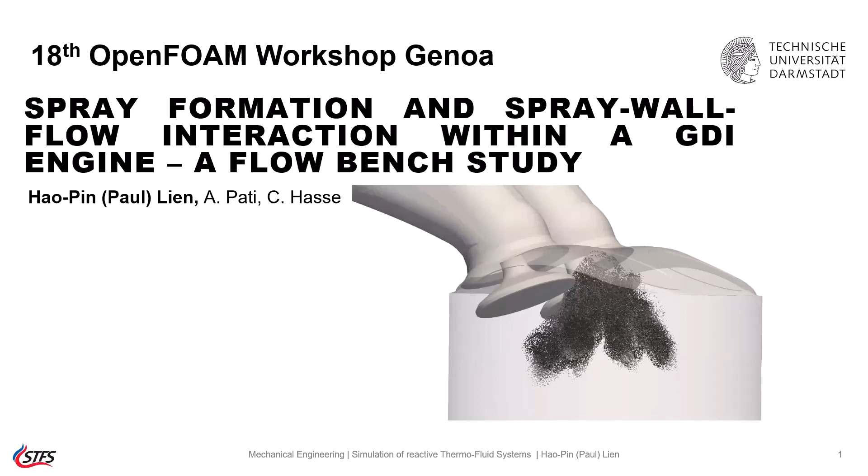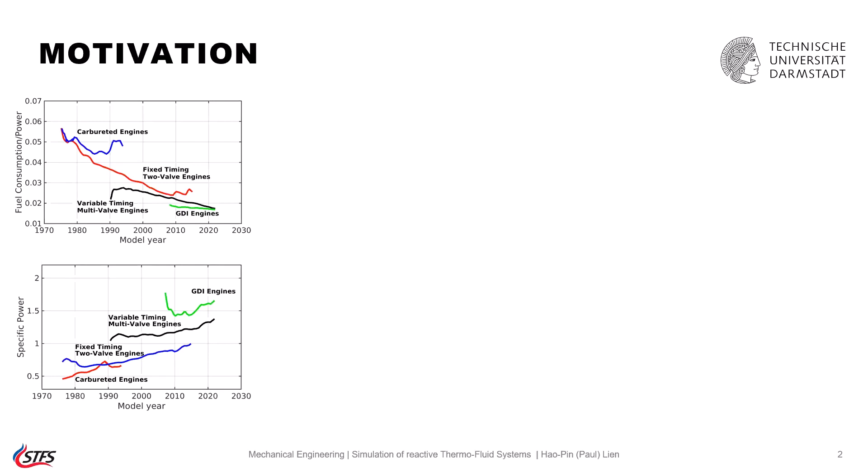Before we directly jump into the topic, I want to give you the motivation for this work. If we look at the time evolution of internal combustion engine development from the carbureted engine towards the GDI engine, we can see fuel consumption actually drops up to threefold. On the other hand, if we look at specific power, it's actually boosted up to 3 times more.

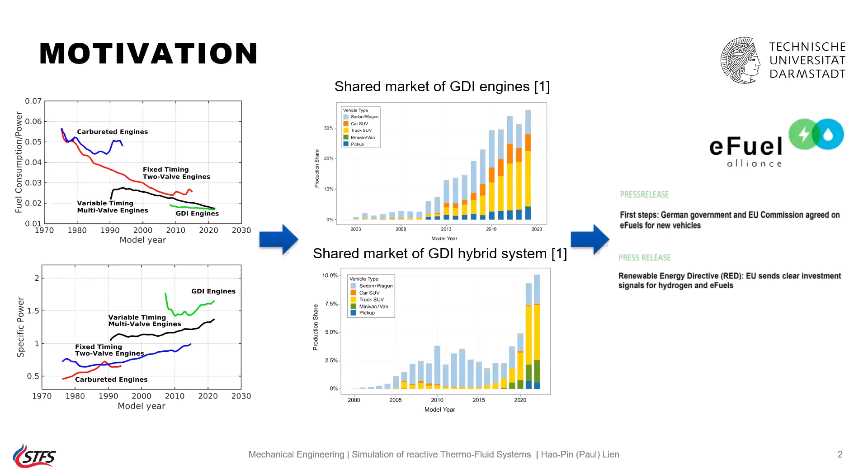Now, if we look at the market share of the GDI engine from last year, we can see it's still climbing, up to 30% of the overall total market share. And the GDI hybrid systems are also climbing, which means there's still room for us to develop. However, I understand we still have a headwind ahead, meaning zero carbon emissions. But we are still advancing ourselves toward e-fuel and hydrogen.

So now this study, we only focus on the Darmstadt engine flow bench. As you can see, the process of the internal combustion engine from the intake flow to combustion, there are actually lots of sub-physics happening. In this study, we only focus on the spray formation and mixing during the early injection condition, meaning the fuel is injected during the intake phase.

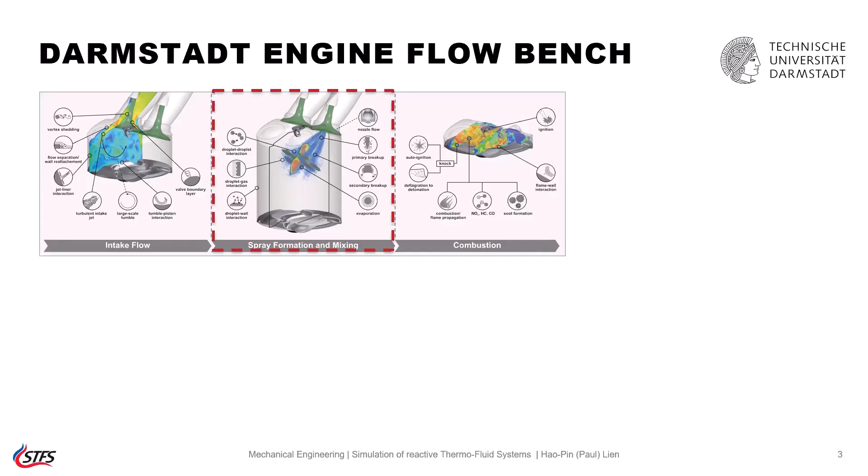And to reduce the complexity of the engine flow, I think the engine flow bench is a good candidate because it's operated with fixed valves and the piston removed, which means it resembles a stationary operation. On the right-hand side, you can see the experimental CAD model as well as the numerical one.

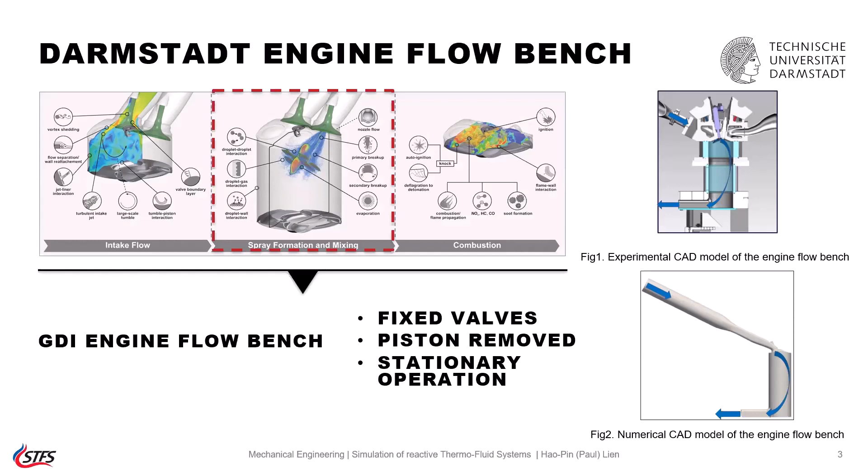Now I want to introduce our modeling development roadmap. We start from the small scale, which is a nozzle flow DNS. Then we move to the constant volume chamber, this is a free spray, what we have done. And then we advance ourselves toward the spray wall impingement. Once the simple geometry was well validated, we move to the complex geometry, which is the engine flow bench.

As you can see, the scale goes from small to large, and meanwhile the resolution reduces from DNS toward LES.

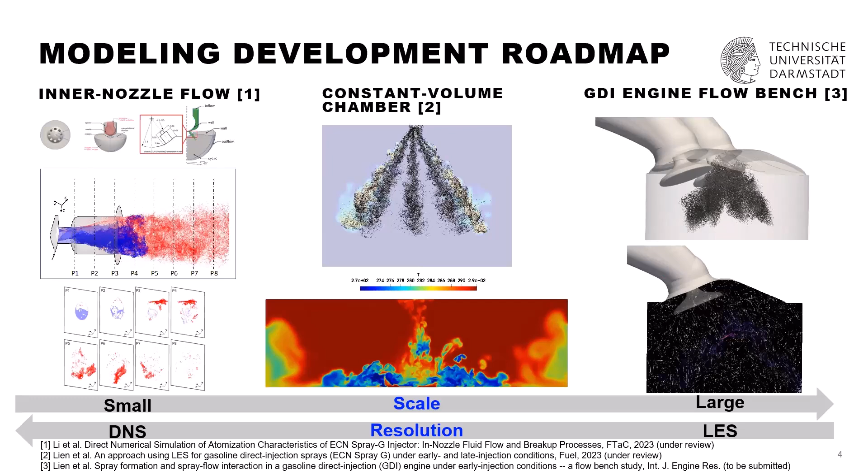If we look at the DNS data here, every time we make a DNS simulation, we always want to get the real physics or correct physics out of it, and we hope we could get a model from it and develop a physical model. So what is this? This is the injector hole. The blue one represents a liquid core, and the red one represents a total droplet.

Each section in between is only 0.2 millimeters, which is really, really small scale. And if we look at the P6 location, which is only 0.6 millimeters away from the injector tip, the total liquid core has totally broken up into droplets.

To give you a clearer idea, we printed out P6, all the droplets on the breakup region map, coordinated with Ohnesorge number and local gas Weber number. You can see none of them actually encountered shear breakup, but rather droplet oscillation and deformation. This is good information for us to develop our model suitable for the GDI engine.

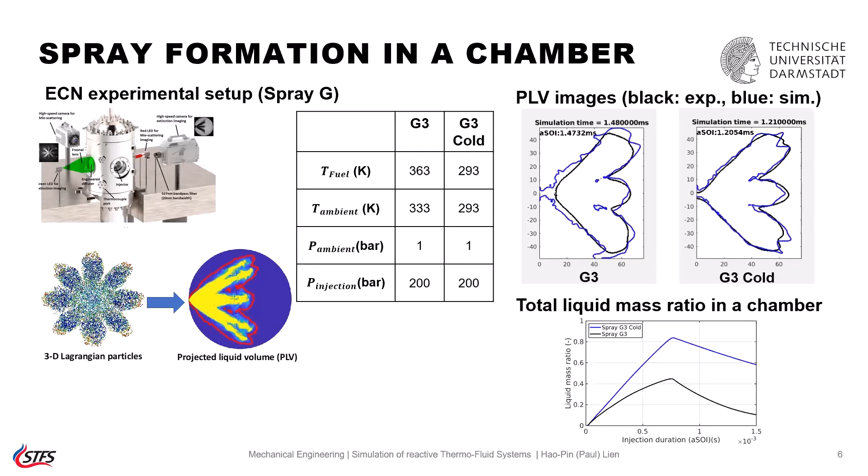So to understand more, we extract the total liquid mass ratio, normalized by the total injected mass, so you can see how much mass has already evaporated. Then we can see in the G3 case, given that it's only 70 degrees higher compared with the G3 cold case, it has about 50% more evaporation.

So there are two ways to solve the problem: one is to use wall-modeled LES, or you use wall-resolved LES. In this case, we certainly don't want to introduce any uncertainties from the wall modeling, so we are applying 15 layers on the wall to facilitate the wall-resolved LES.

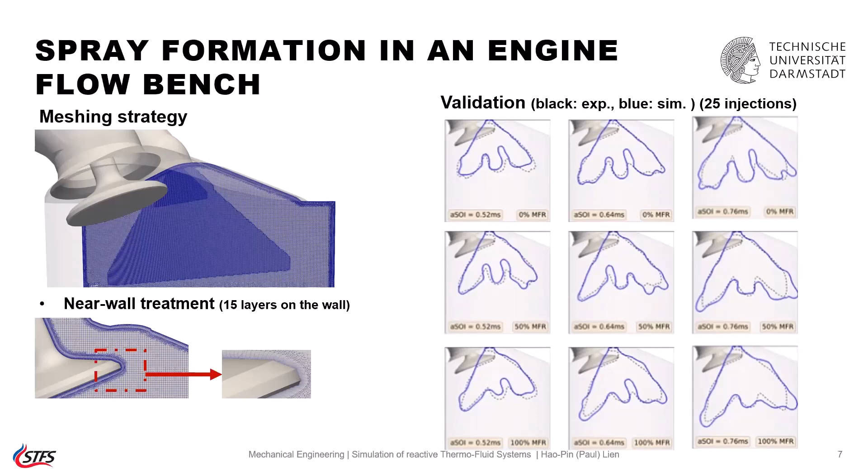We match quite well, but as we increase the mass flow rate, you can see the overall plume shape gets distorted. The left-hand side part is stretched by increasing the mass flow rate, and on the right-hand side, the overall plume actually swings to the right.

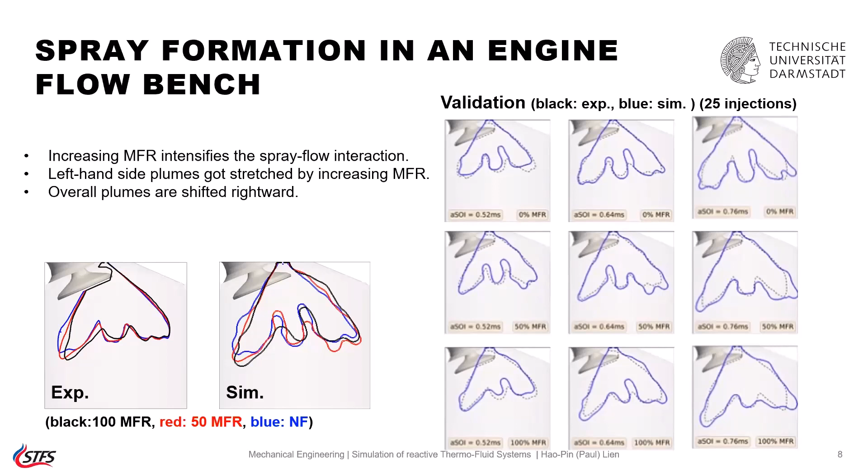We assumed that if the injector is axisymmetric, it should have homogeneous behavior. However, this is actually a heterogeneous phenomenon, though we can still categorize it somehow. If we look at the plume far from the intake valves, it has more evaporation and more distortion by the intake flow. The plume close to the intake valve has less influence from the intake flow, so it has less evaporation and less penetration distortion.

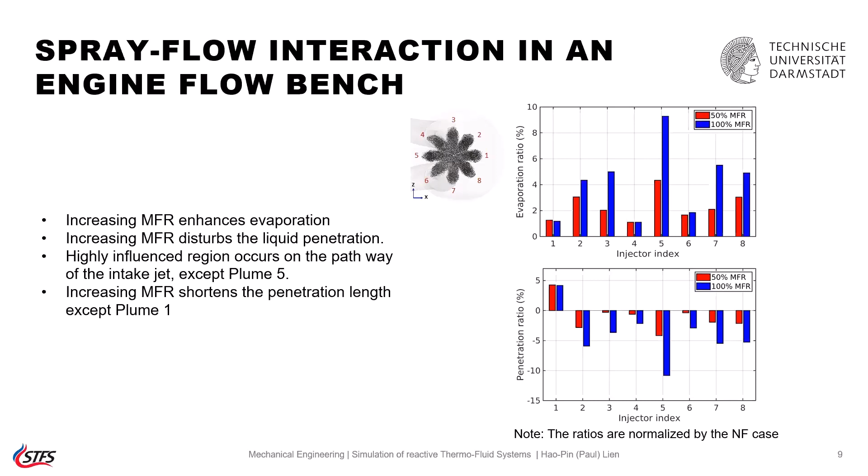But the most interesting are plume 5 and plume 1. Plume 1 is the farthest one - I expected it should have the most evaporation, but instead there's less evaporation and prolonged penetration. On the other hand, plume 5, close to the intake valve, actually has more evaporation and the most distorted penetration.

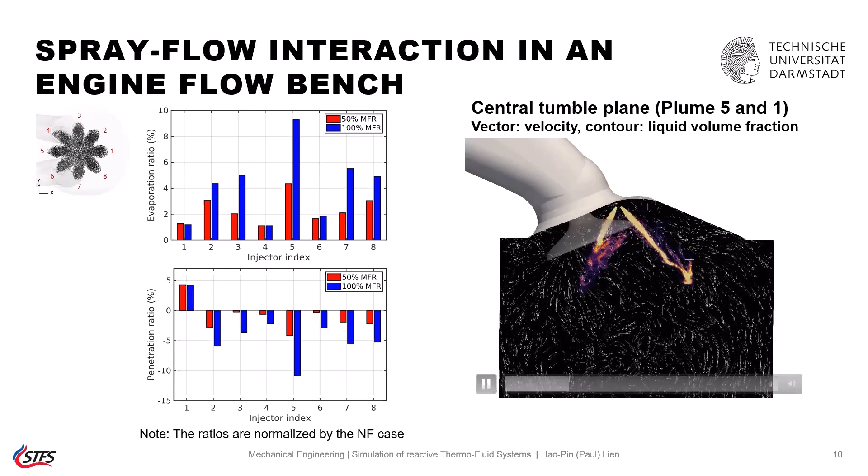So what is that? We extracted the liquid volume of the spray, and the vector here represents velocity. You can see on the left-hand side that plume 5 penetrates, then dissipates, and the structure gets destroyed along the pathway. The story happens quite differently for plume 1.

To give you a good idea of what's going on, we plot out the velocity field. When the two intake flows come through the two intake ports, they converge together and form a strong vortex in the middle, which lies right in the pathway of plume 5. Therefore, when plume 5 penetrates through the vortex, it dissipates and the structure is destroyed.

On the other hand, as we can see here, there is a tumble flow, and the tumble flow actually gives momentum to plume 1 and prolongs it.

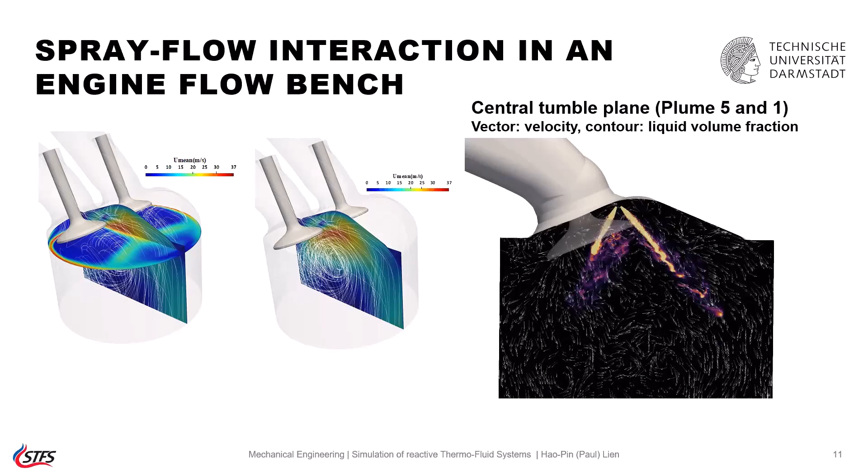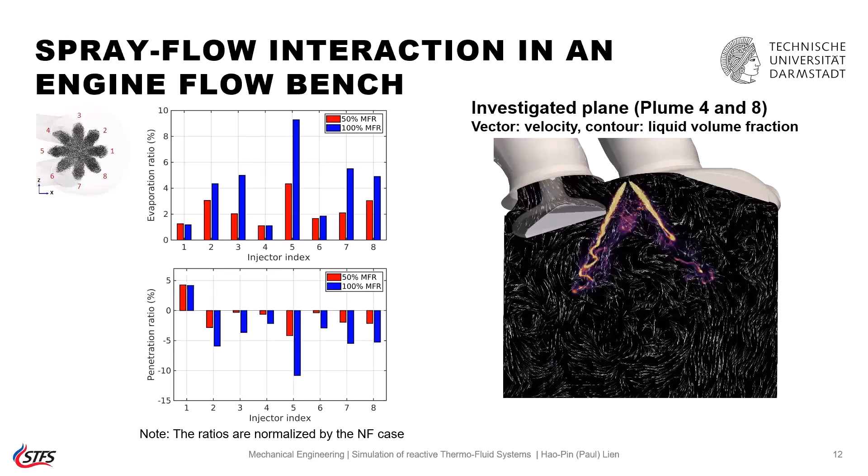But something interesting is plume 4. It actually hits the valve wall, and when it hits the valve wall, it can generate wall film, and the wall film might create soot, create a misfire. This is a hesitation, and this is something we certainly don't want to happen.

So we are using a single layer and developed a suitable spray wall impingement model, spray wall interaction model, to capture this and to see how, if we increase the mass flow rate, what convection evaporation effects can reduce the overall mass. We can see that as we increase the mass flow rate, the overall fuel mass actually decreased up to 50%.

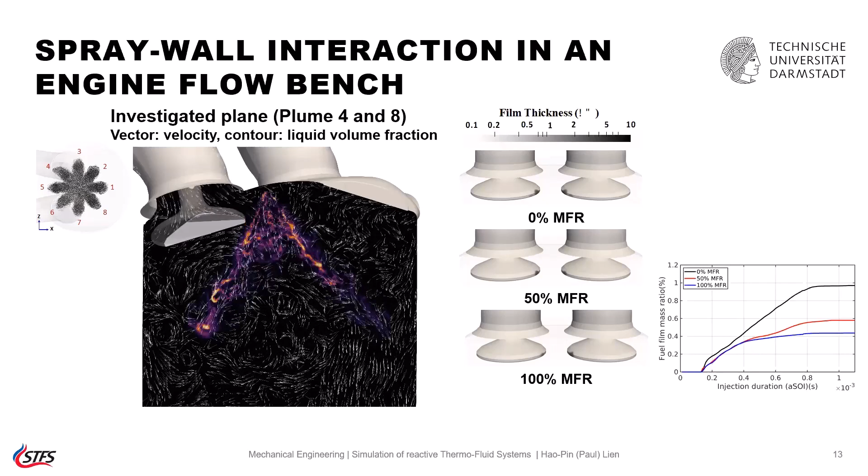I also have some preliminary results in the poster room, in the poster session before, so if you are interested you can have a look there. Then we are going to methanol fuel to understand further.

I put the bikes up there, not to just encourage you to run the bikes, because it's like a metaphor from ECN. Given that we have headwinds ahead, right, we have achieved a lot in the past, so we can still achieve and overcome this headwind. So just cheer up the engine group. Thank you.

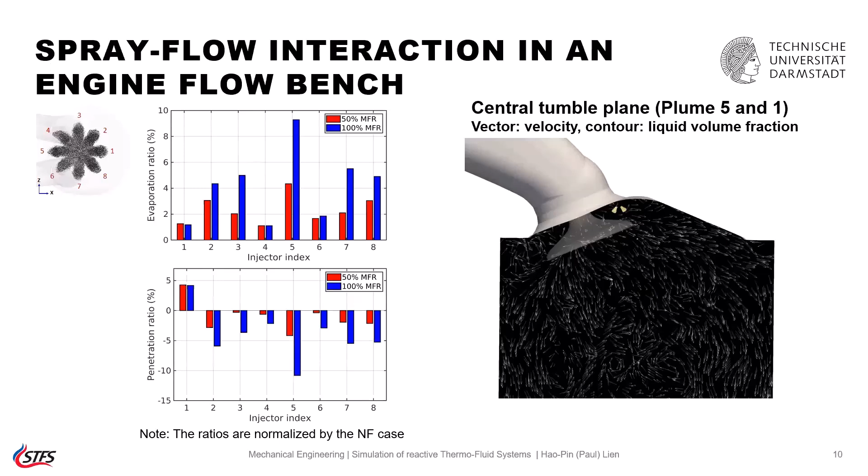Is that a Lagrangian model? Yes. So then you describe droplet size. Right. Yes. So we get the necessary data from DNS. This is how we want to run DNS, because otherwise it's just too expensive.

It's actually a one-way coupling.

So there's another way to do it: you do the whole structure. So maybe I'll go with this one. There's another way, so you do this DNS simulation and then you restore all the necessary data from, let's say P6, which is this part. Then you start to apply it to the Lagrangian—is that what I'm saying, right? Yeah, but we have one solver doing a direct transform to the Lagrangian field. But the problem is you're going to solve the whole domain.

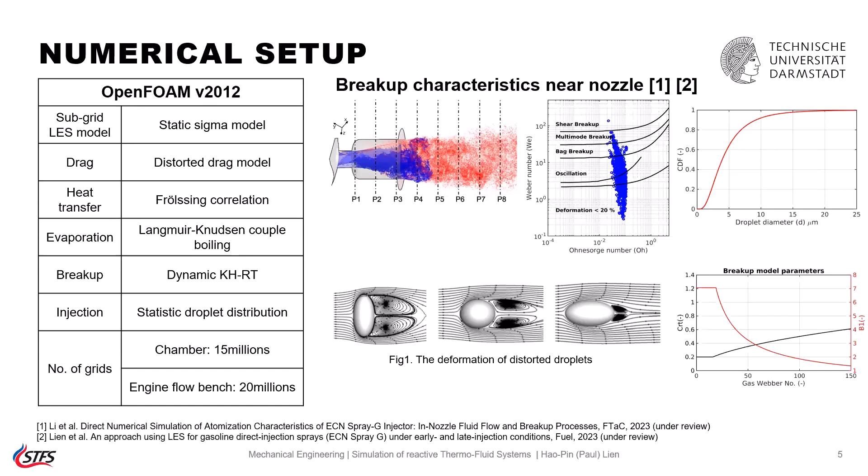Then this part is, let's say, micro, and this part is millimeter, so it's a totally different scale. I can tell you, here the minimum cell size is 125 micro, and here it's 1 micro, so it's 125 times more. If you bind it together, the CFL number is always the smallest one, which is forever.

Flash boiling wasn't shown here because the flow bench study is based on the G3 case, to be honest. But we have the G1 case in the poster, so if you're interested, you can have a look. Yeah, sure, good, of course.

Welcome everybody, I'm here to present some work, as my colleague has introduced. We are moving towards advanced fuels which are CO2 neutral, and this CO2 fuel is actually critical in engines. We want to use these biofuels because they help us follow strict emission standards, and they help achieve the European Green Deal's goal of zero CO2 emission.

What's the problem with ethanol and methanol, or oxygenated fuels in general? We need a large amount to be injected inside the engine. They are potentially corrosive for the metal parts of the engine, and prone to oil dilution, especially during cold start operation. From cold start, with modern engines and hybrid solutions, this is extremely important, meaning we expect a lot of warming engines, so we have to understand all the phenomena in such engines.

All of these are the phenomena involved. Here it's an advantage of OpenFOAM, because thanks to its open source flexibility, we can take really different models and cover all of this together.

We have several problems: multiphase flow, turbulence, combustion, knock prediction—a lot of problems. But today we just want to focus on the drop-wall interaction and how we can solve it in engine simulation, or in general, in complex geometry systems.

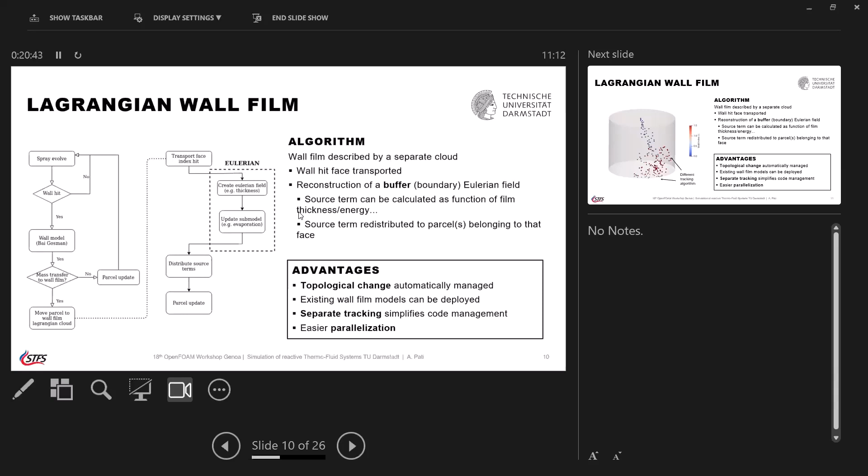Yes. If we don't find it, in any case, we have also 28% of computational cost. But for our case...

In that case, the initialization is possible. In our case, of course, we don't have this problem because it's a direct injection spray. So we started it, we know that the spray is 0 at the beginning. So for the initialization, it's always possible to initialize a set of Lagrangian. I think the initialization is possible - it's just a set of parcels on the wall. That could be a possibility. Maybe, why not? Yes, definitely.

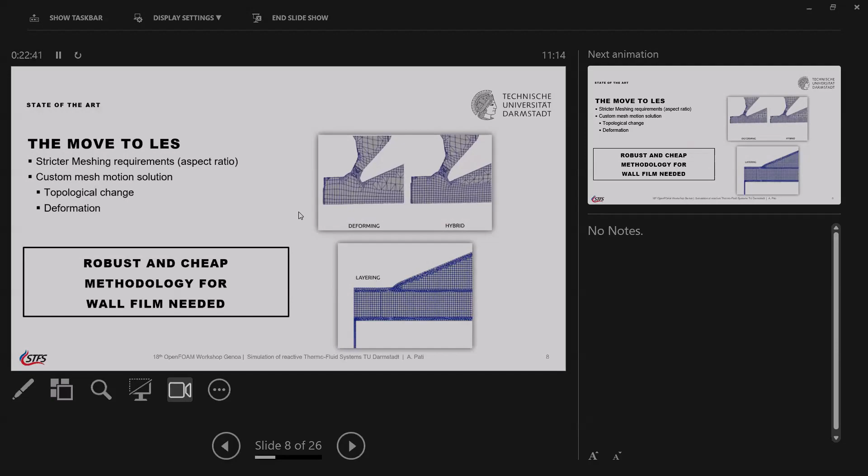Thank you very much. I'm Motohiro Oshima, from Toyama Prefectural University in Japan. Today's story is a very simple story. The title is the customization of OpenFOAM Lagrangian solver for superheated fuel spray vaporization.

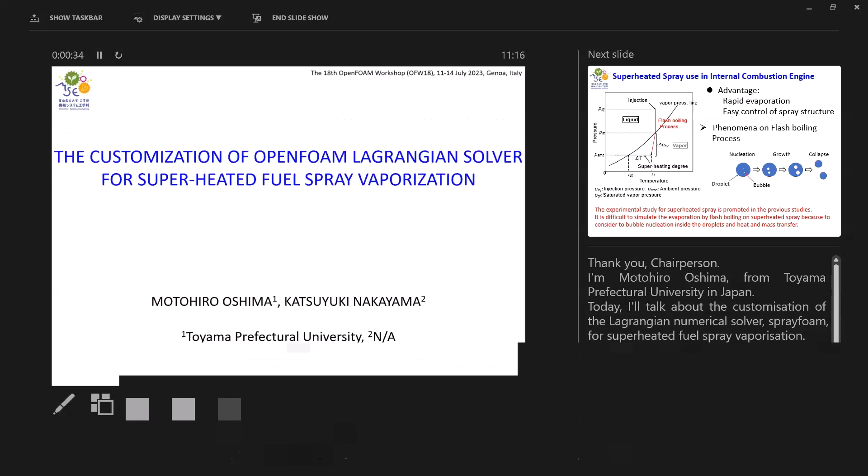Superheated vaporization flashing spray has advantages such as rapid evaporation, and control of the spray structure, and so on. However, the phenomena is more complicated, more complex. So this figure shows the process on a pressure-temperature diagram.

So the fuel is injected from injection pressure to the ambient pressure. So the pressure reaches the vapor pressure. So evaporating starts, it evaporates. As volumes are spread in the bubble, the droplets inside nucleate, grow, and collapse.

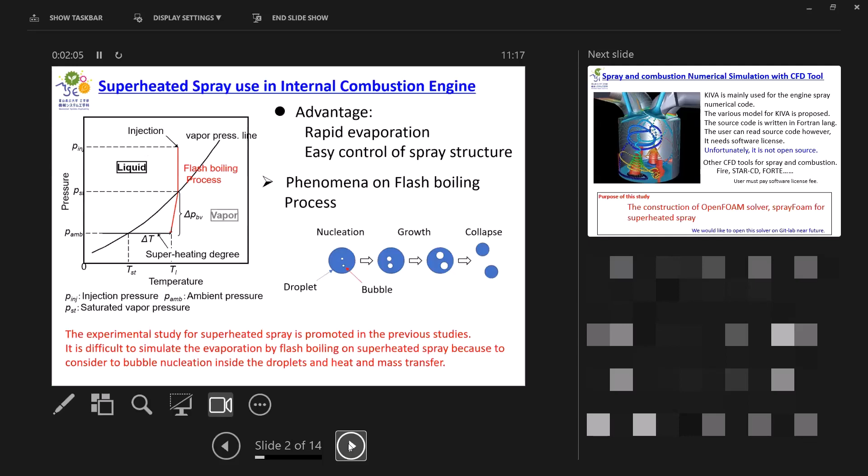The experimental study for superheated spray has been promoted in previous studies. However, it is difficult to simulate the evaporation by flash boiling spray because it considers bubble nucleation inside the droplets, and heat and mass transfer.

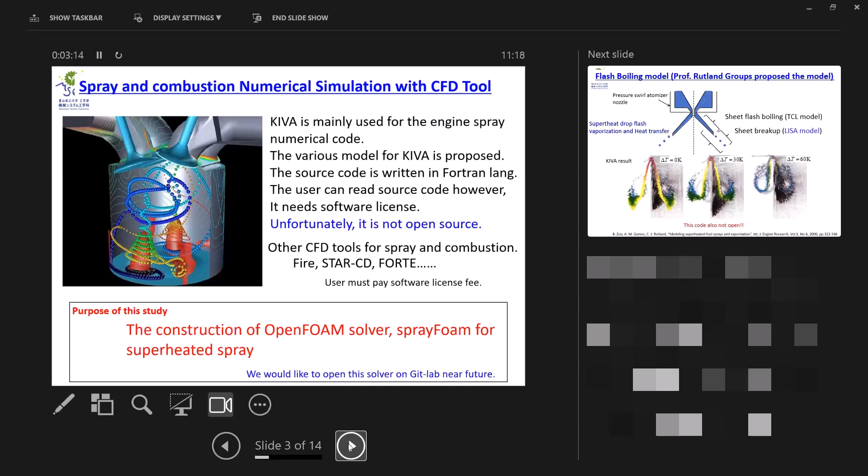As you can see, other CFD spray and combustion codes, such as Fire, STAR-CD, FORTE, and so on - the user must pay a software license fee. The purpose of this study is the construction of an OpenFOAM solver, sprayFoam, for superheated spray, and we are directing this program into the future.

So this is a flash boiling model. This model is proposed by Professor Rutland's group. This figure is a strain for a pressure swirl atomizer nozzle. So this model consists of three parts.

One part is sheet flash boiling, the TCL model. The second part is sheet breakup model. And superheated drop flash boiling, vaporization and heat transfer. So this is the KIVA result. Delta T is the difference of liquid temperature, pure temperature, and boiling point.

Delta T is zero, delta T is zero means there is no flash boiling.

The spray cone angle is wider, and the force is promoted. However, unfortunately, this code is also not open.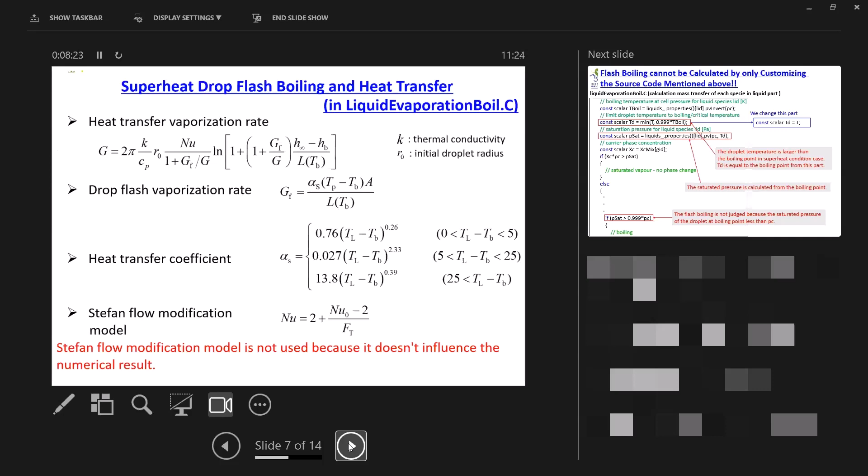Here are the Nusselt numbers in superheated spray, so changes must be made using the Stefan flow modification model. But the Stefan flow modification model is not used because it doesn't influence the numerical result.

However, flash boiling cannot be calculated only by customizing the source code mentioned above. This is part of the LiquidEvaporationBoil.C code. This task calculates each species in the liquid part to judge flash boiling or evaporation.

You can see this curve: the droplet temperature is larger than the boiling point in the superheat condition case. From this graph, T is equal to the boiling point, and the saturation pressure (PSAT) is calculated with the boiling point.

Let's move to the numerical condition and computational domains. Iso-octane is used. The fuel temperature is 435, superheat degree is 60 Kelvin, ambient pressure is 100 kilopascal, and ambient temperature is 300 Kelvin.

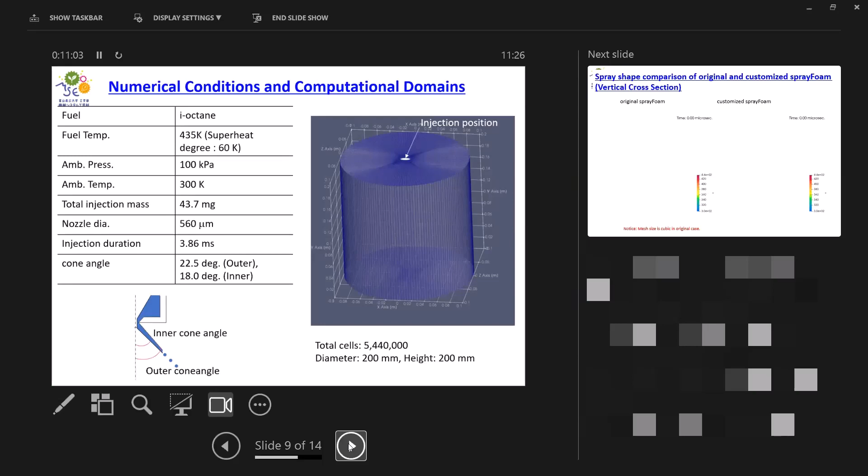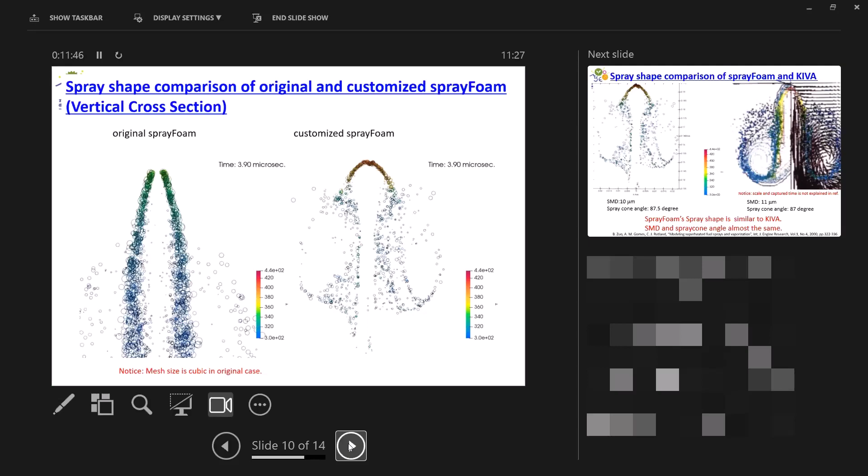The color represents the temperature, droplet temperature. We compare the sprayFoam results with reference data, but the scale of the captured time is not exactly correct.

The scale factor may not be correct, but the sprayFoam result is similar to KIVA, and the SMD and spray cone angle are almost the same.

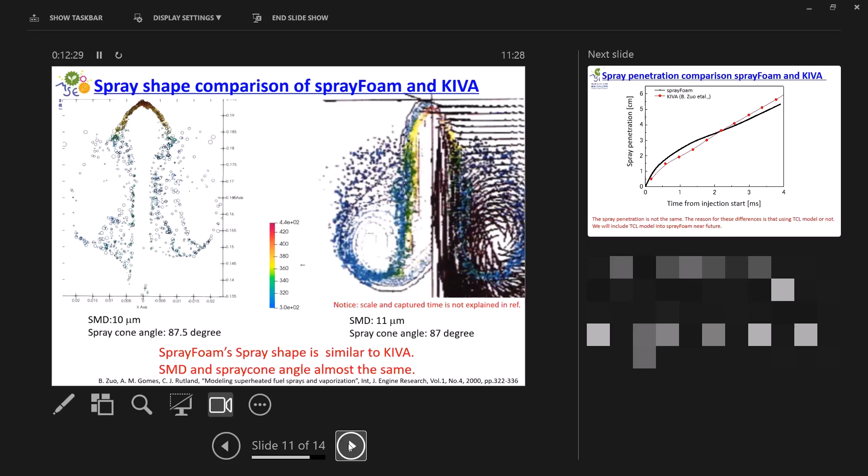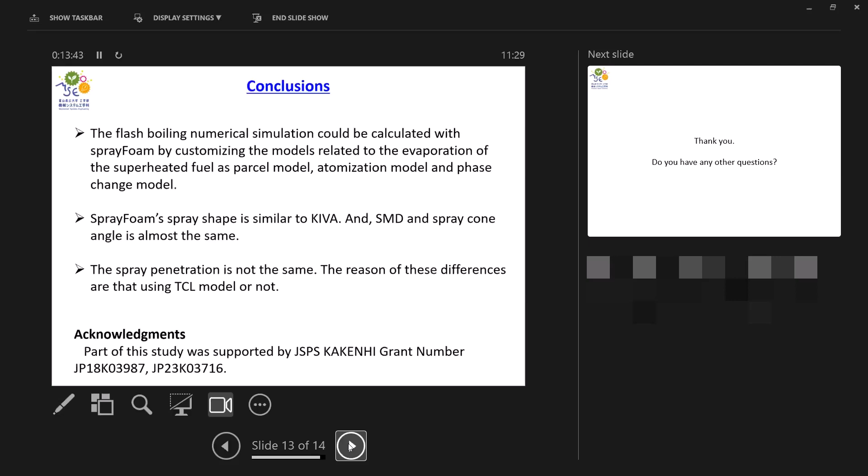SprayFoam's spray shape are similar to Kiva, and the SMD and spray cone are almost the same; the penetration is not the same. The reason for this difference is whether the TCL model is used or not. This is all of my presentation, thank you very much.

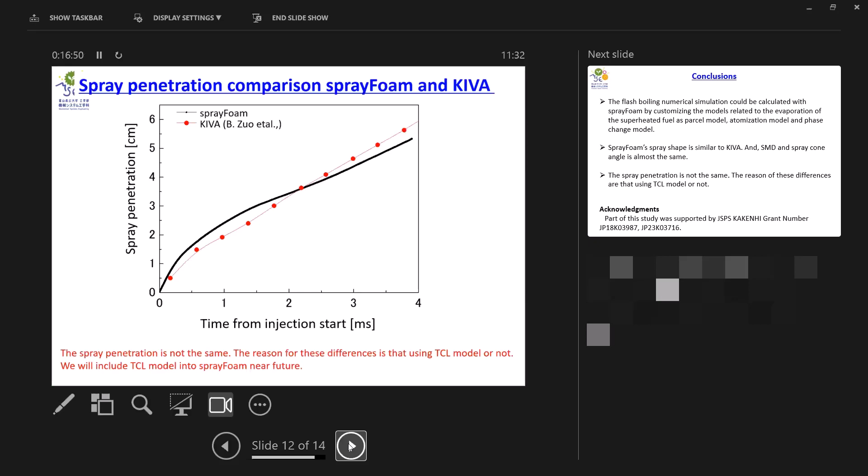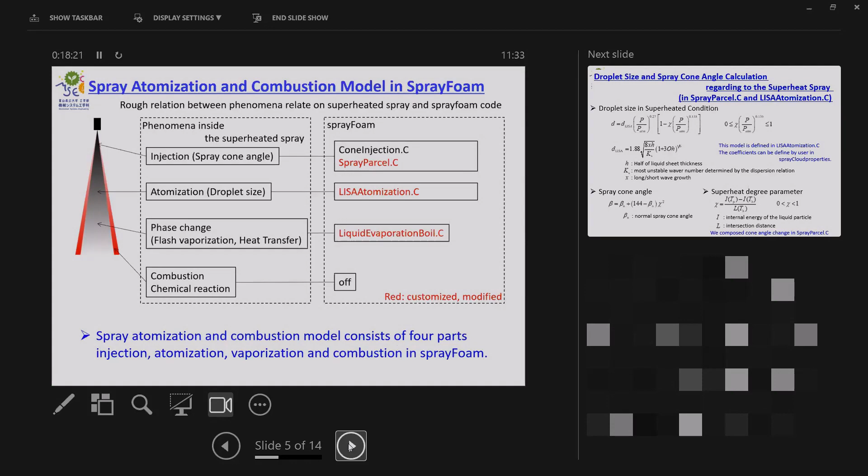Good morning, everyone. My name is Muthaiah, and I am a research scholar from the Department of Mechanical Engineering at the Indian Institute of Technology, Madras. Today, I am delighted to share with you the research and findings from the implementation of a Lagrangian model for the atomization of liquid jet in cross-flow spray in OpenFOAM.

The motivation for this work comes from my focus on CFD modeling of combustion in afterburners. In an afterburner, the combustion process heavily depends on the jet-in cross-flow spray. Hence, a robust model for the atomization of the jet-in cross-flow spray is needed.

Introduction of the jet-in cross-flow spray. Jet-in cross-flow spray, or JICF spray, is a widely used spray generation technique. This atomization technique is simple but also efficient. It finds usage in many aerospace applications such as gas turbine engines, afterburners, and ramjet combustors. In this method, a liquid jet is injected into a cross-flowing gas stream and is atomized by the aerodynamic forces to form the spray cloud. In the current version of OpenFOAM, there is no atomization model for this kind of spray.

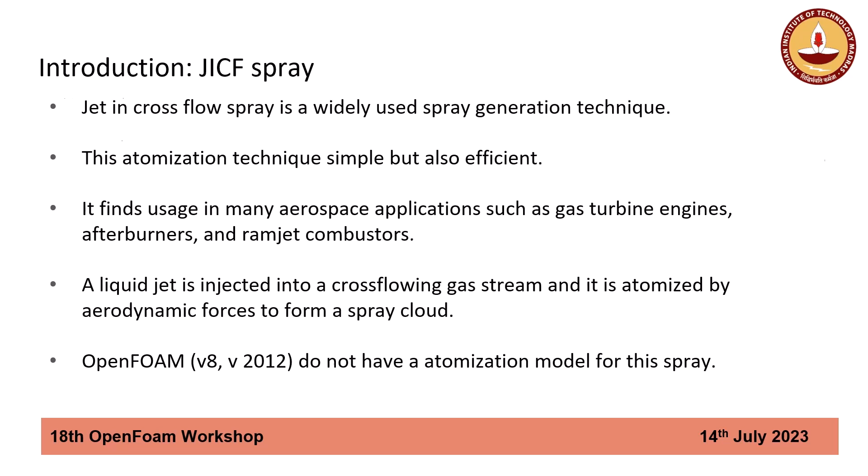Next is the breakup regime. After a distance, the liquid column collapses in what is known as the primary breakup process. This forms large ligaments and droplets. These large droplets further break into smaller droplets in the secondary breakup process and are carried by the flow. This completes the spray formation. The fundamental mechanisms in this spray formation process are quite complex, and modeling them in a CFD framework is quite challenging.

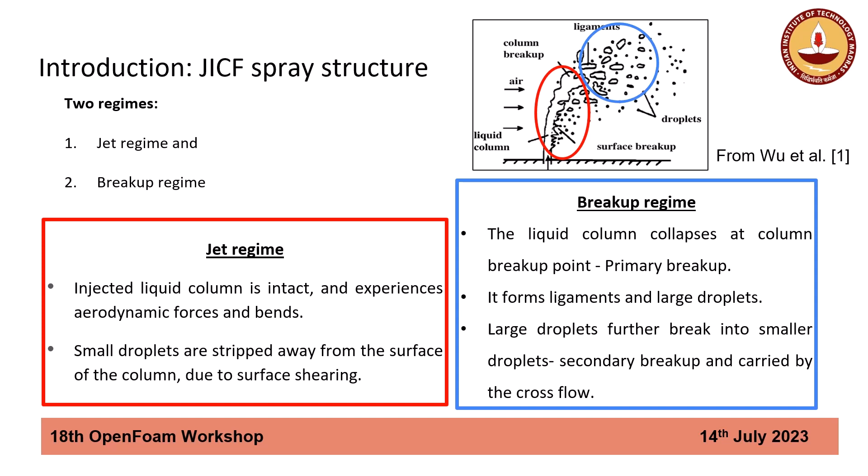Generally, there are two approaches for spray modeling in CFD. First is the volume of fluid method, the next is the Lagrangian particle tracking method. In the volume of fluid method, both the gas and the liquid phase are resolved in the numerical grid, and this method is suitable for simulating dense spray regions, breakup processes, and droplet interactions. However, this method is computationally expensive, and when combustion is involved, this becomes even more challenging.

The next is the Lagrangian particle tracking method. In this method, only the gas phase is resolved in the numerical grid. The spray is treated by considering a collection of particles known as Lagrangian parcels and tracked in the numerical grid using the equations of motion. This method is suitable for non-dense, far-field spray regions and mostly used in combustion applications. In this work, we use the Lagrangian approach to simulate the JICF spray in OpenFOAM.

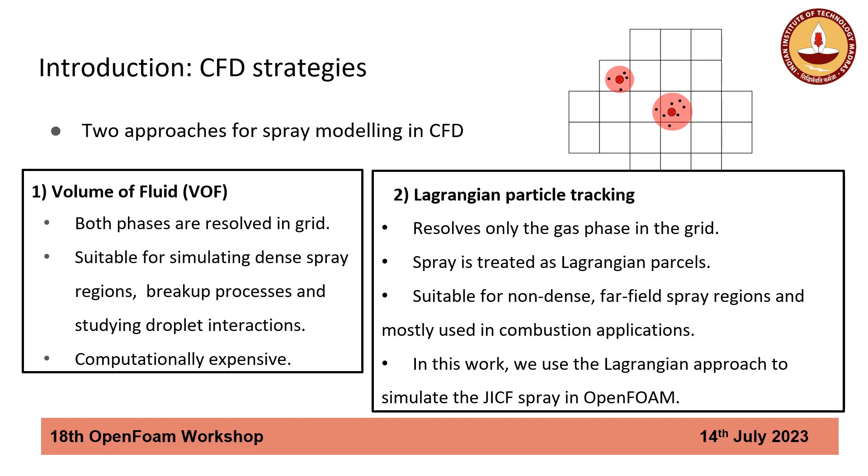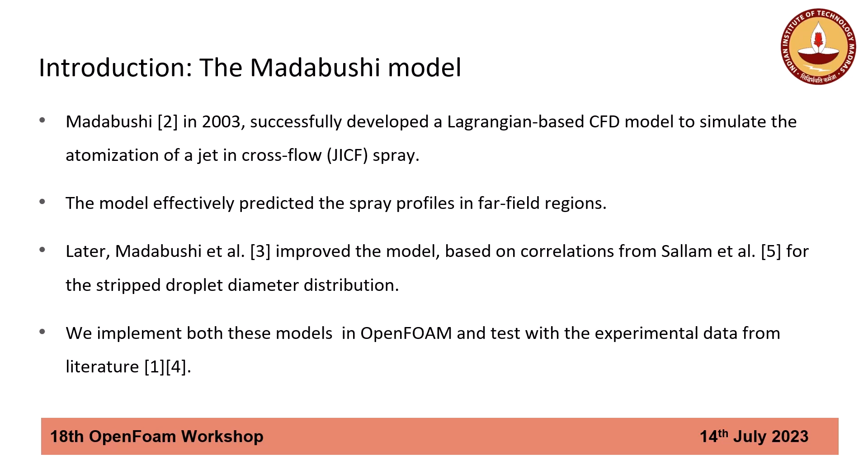Introduction to the Madabushi model for JICF spray. In 2003, Madabushi developed a Lagrangian-based CFD model to simulate the atomization process of JICF spray. This model effectively predicted the spray profiles in far-field regions. Later, Madabushi et al. improved the model based on correlations from Sallam et al. for stripped droplet distribution. We implement both models in OpenFOAM and test them against experimental data from the literature.

Here we summarize the Madabushi atomization model. This Lagrangian-based model has three different sub-modeling aspects: first is the modeling of the injection process till the column breakup point, next is modeling of the surface stripping process, and finally modeling the secondary breakup process and completion of the spray. In the next slides, we will discuss each of these in brief.

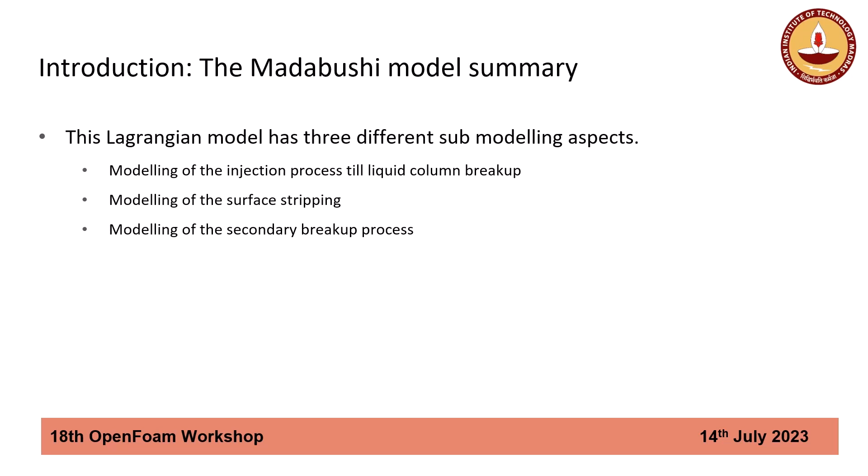In modeling the injection process, instead of a cylindrical jet, spherical particles with the same diameter are injected. However, the coefficient of drag is adjusted to that of a cylinder to have correct aerodynamic behavior. The particles are tracked and considered to be inside the liquid column till the column breakup point. The time period of the column breakup is calculated using the correlations given by Wu et al., as shown here.

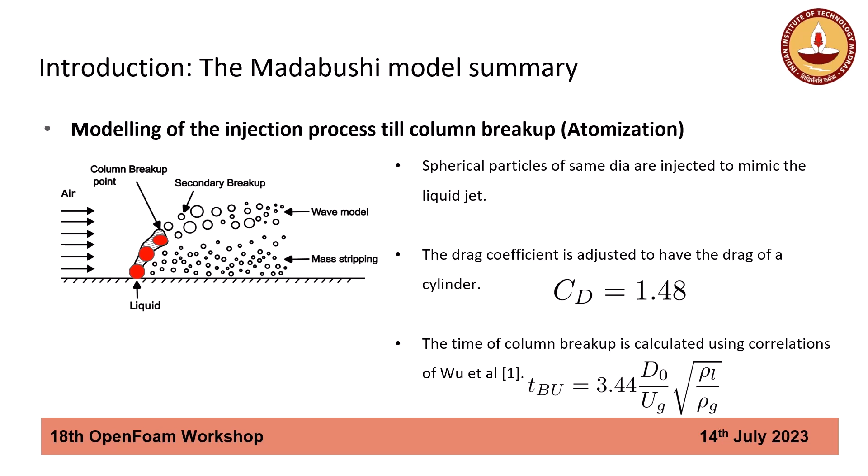When the parcels are inside the liquid column, surface stripping of the droplets occurs, and this surface stripping is modeled using the wave model based on Kelvin-Helmholtz instability. The expression given here is used to calculate the rate of reduction in the parent parcel diameter. Here, d is the diameter of the parent parcel and dc is the stable diameter after Kelvin-Helmholtz breakup given by the wave model, and tau is the time period of the breakup process estimated using the wave model.

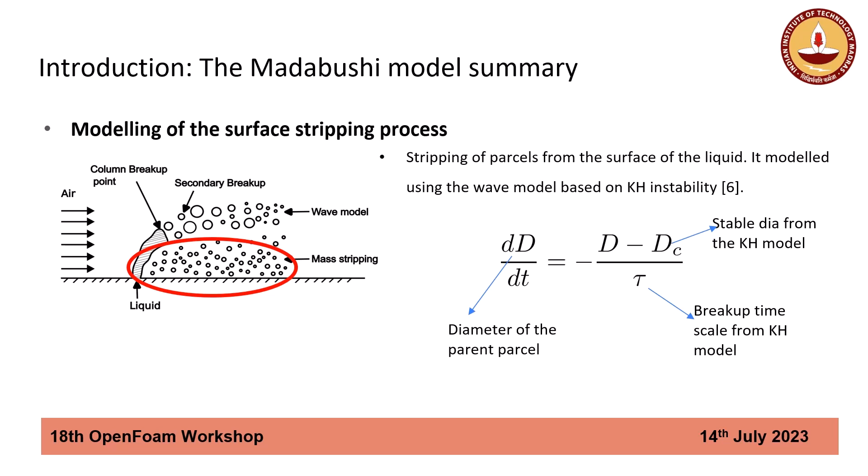Using this expression, the diameter and mass of the parent parcel are continuously reduced, and the stripped mass is accounted separately. The reduced diameter from the parent parcel is continuously accounted as stripped mass. When the stripped mass is greater than 5% of the parent parcel, a new child parcel is added with the mass of the stripped mass.

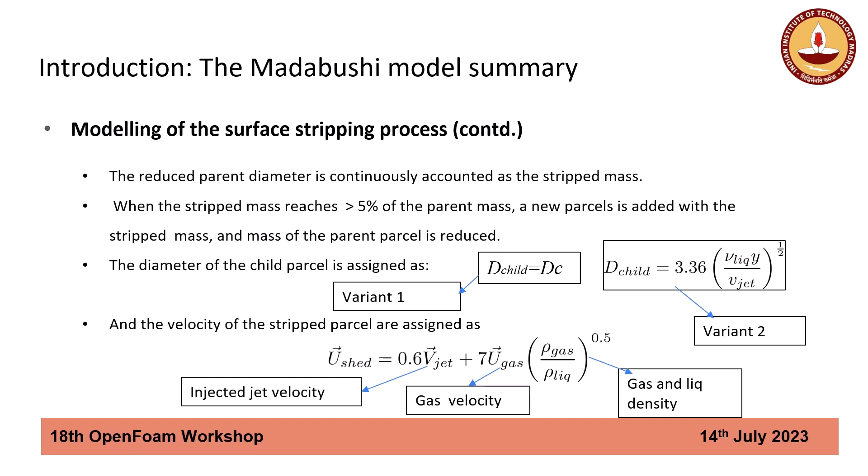The diameters of the child particles are assigned in two ways. One is using the stable diameter dc estimated using the wave model; this is considered in variant 1 of the current implementation. The next is the child diameter estimated using correlations given by Sallam et al., used in variant 2 of the current implementation. Later, the velocities of the stripped parcels are assigned as a combination of the injection velocity and the gas phase velocity, as given here.

Next is modeling of the secondary breakup process. Parcels coming out of the liquid core are broken up in this process. Each of the spherical particles coming out of the liquid core are broken into 5 child parcels based on local Weber and Ohnesorge numbers. The time period for each of the 5 breakup events is estimated using the expression based on gas phase velocities and gas phase Weber numbers, as given here. A child parcel is added at each of these breakup times, and the child parcel SMD is calculated using the expression given in this box.

Large parcels resulting from this secondary breakup process are again subjected to the wave model that was mentioned previously.

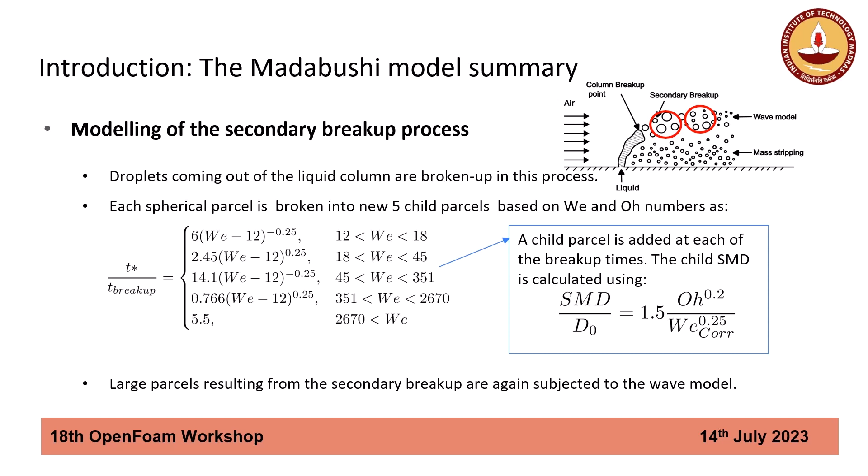With the Madabushi Lagrangian model introduced and summarized, we state the objectives of the work. The objectives are to implement both variants of the Madabushi atomization model in OpenFOAM, validate these models with data from the literature, and identify potential improvements to the models.

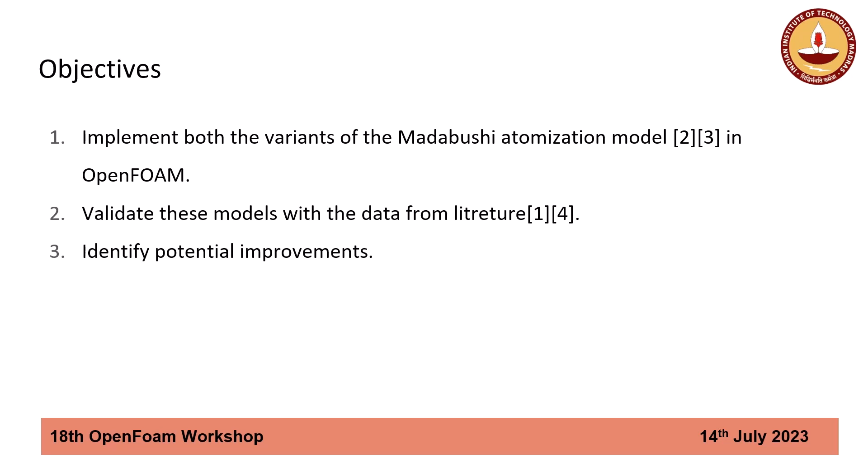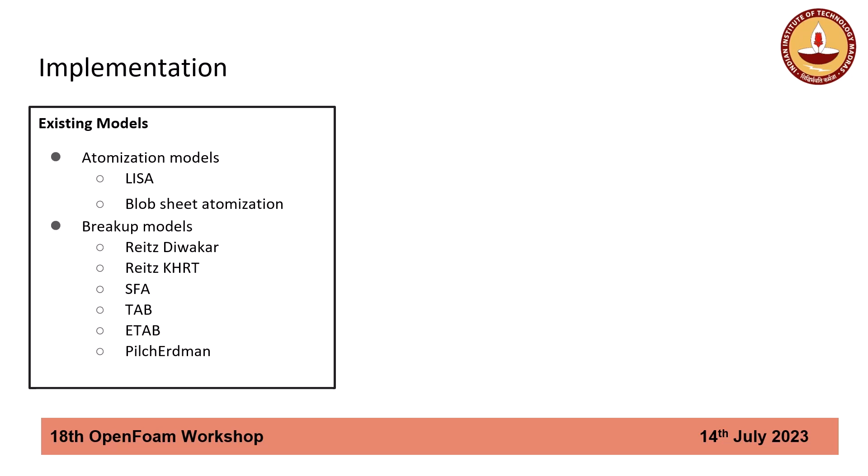Here we list the implementation and modification work that we carried out. Before moving on to the implementation, we looked into the existing models, and the major issue in the existing atomization part was that there was no coupling with the gas phase during the atomization part. That is, the liquid droplets that are injected don't feel any aerodynamic forces, and there was no surface stripping model, and it needed a new class of model to be implemented in the Lagrangian library.

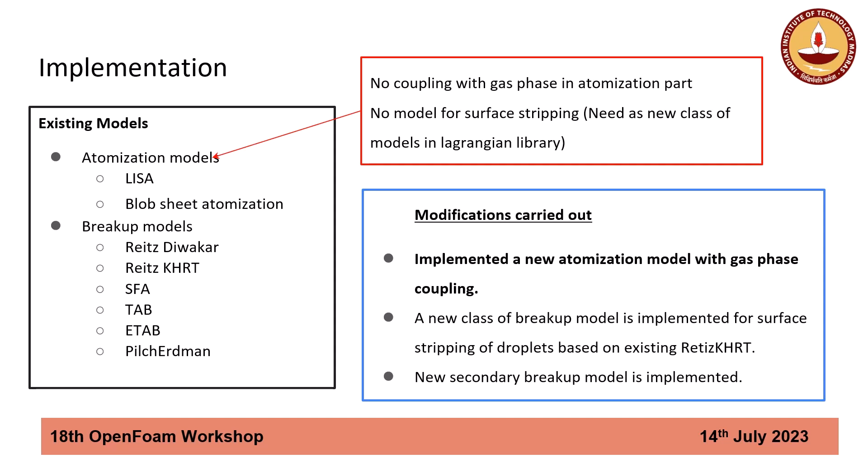Here are the modifications that were carried out. We implemented a new atomization model with gas phase coupling. We implemented a new class of breakup model for simulating surface stripping, based on the existing Reitz KHRT breakup model. And we also implemented a secondary breakup model based on the work of Madabushi et al.

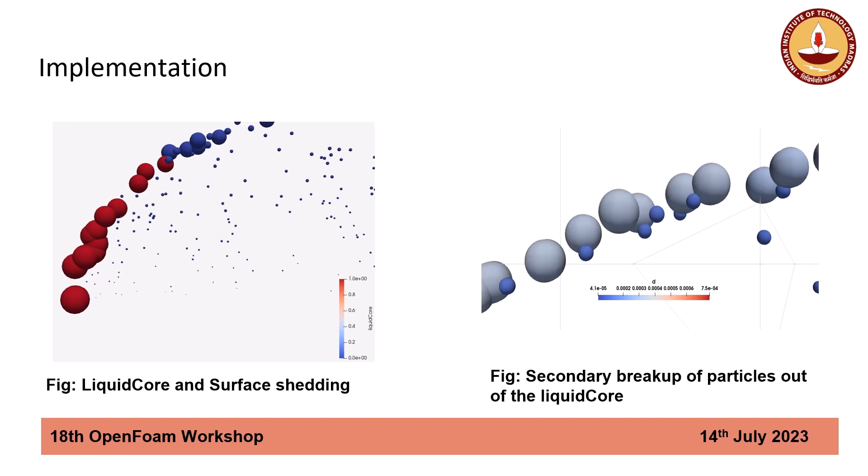We implemented the two variants of the Madabushi model by modifying the existing sprayFOAM solver. Then we moved on to validate the implementations using data from the literature. We chose data by Wu et al. and Leong and Hautman. We ran multiple test runs using compressible unsteady RANS calculations with the K-omega SST turbulence model. The computations had a similar setup in which there is a flow in the duct simulating the cross flow into which the spray is injected perpendicularly, as shown in the figure.

In the coming sections, we show results from each of the validation cases.

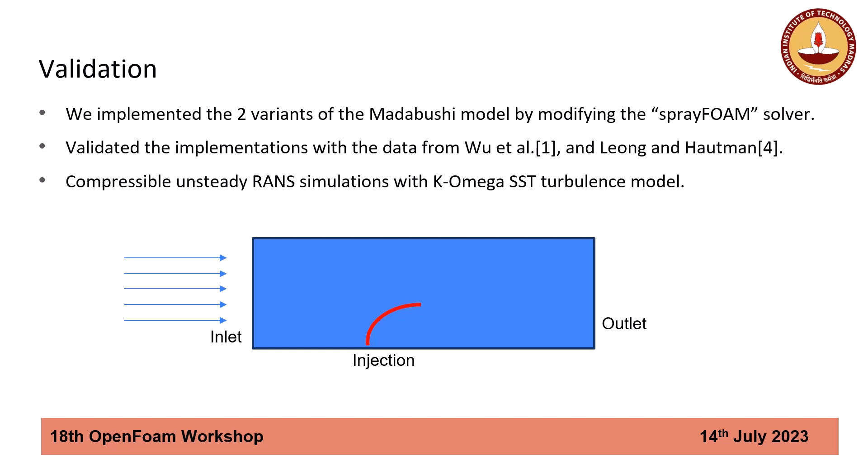Here the water is injected with a velocity of 29 meters per second into a cross flow stream of 103 meters per second.

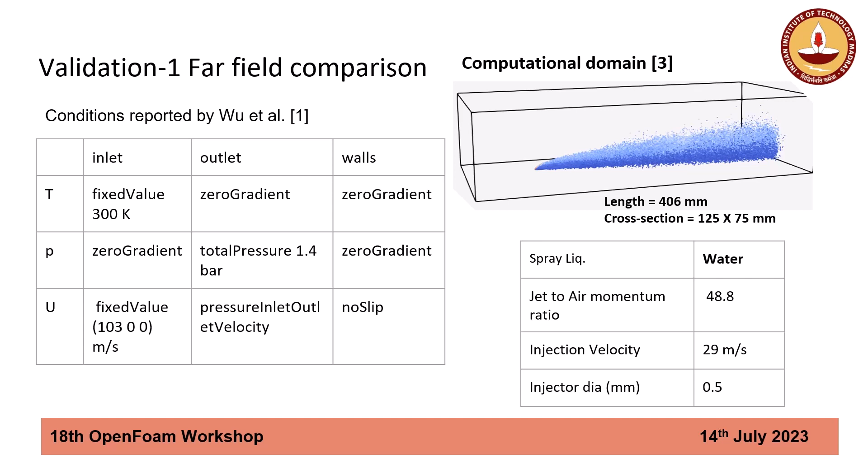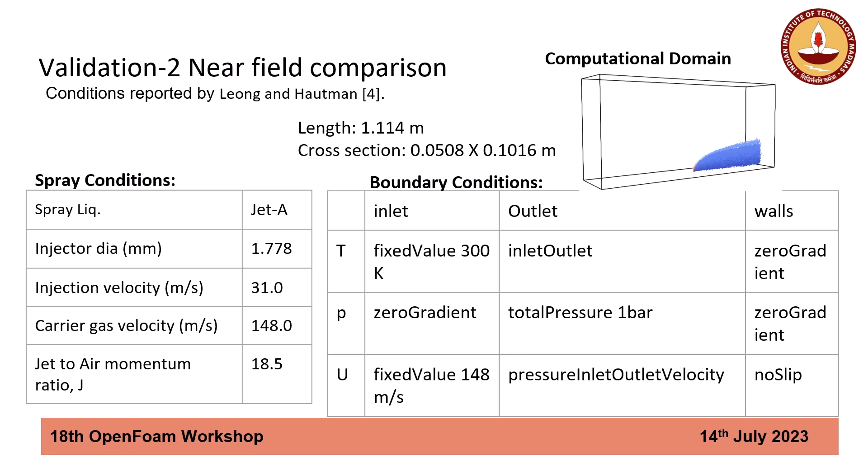The spray liquid used here is Jet A, and the Jet A liquid is injected with a velocity of 31 meters per second into a cross flow stream of 148 meters per second. The injected diameter used here is 1.778 mm.